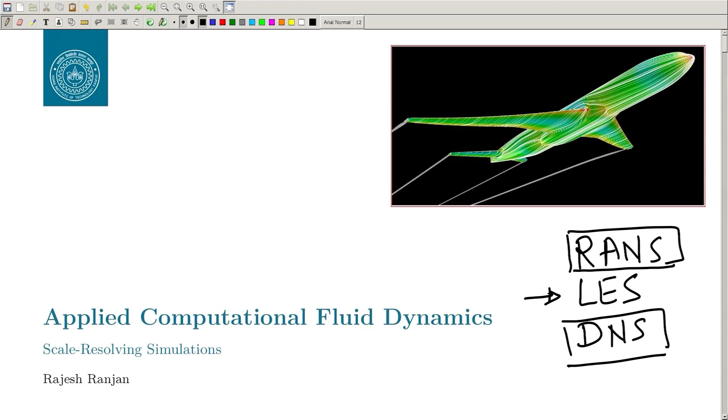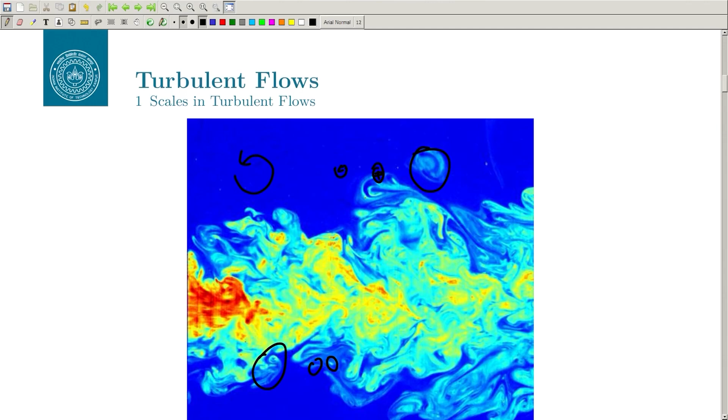So, you have a variety of eddies. When we say eddy, we have a picture like this in mind, but it's a kind of flow which has got some kind of vorticity, right. You can have large eddies and small eddies, but it's very difficult to identify or segregate a large eddy from a very small eddy, because all these different scales are mixed up. But in order to capture very small flow features, which are very fine features, we need to have that kind of grid; only then we can capture that, right.

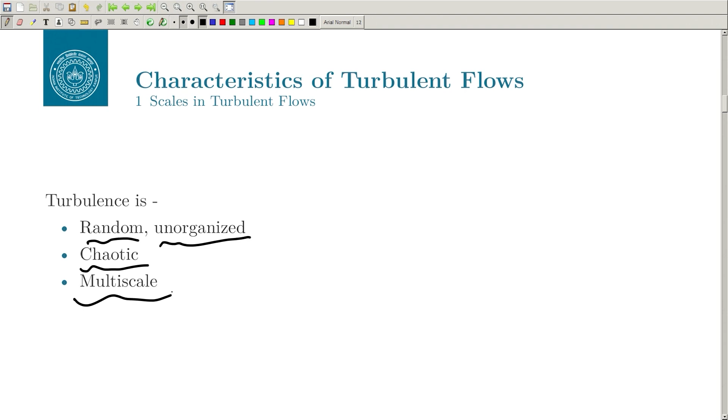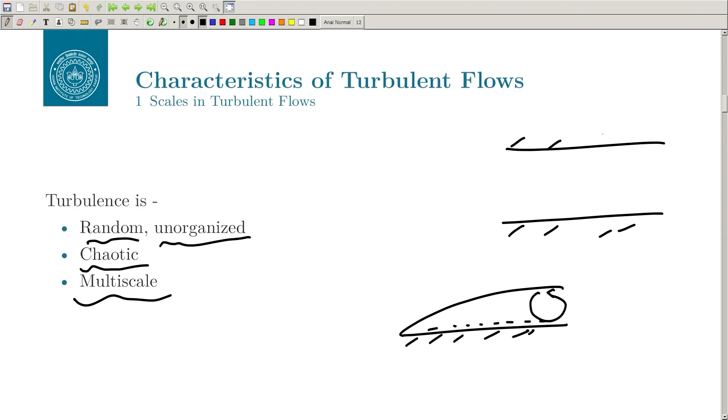So, look at any turbulent flow: the turbulent flow is random, it is unorganized, and despite being random, it has got some kind of statistical properties. It is chaotic, and it has got multiple scales. So, we can have very small scale to very large scale. Let us take the example of the boundary layer. You can have something which is happening very close to the wall, let us say here, and then you can have something which is of the scale of this. Similarly, let us say you have flow inside a channel. This is your large scale phenomenon, and then you have something inside the boundary layer. So, you have to resolve both the smallest scale as well as the largest scale.

Let us talk in terms of the atmospheric boundary layer. Let us say this is your big atmosphere. You have to resolve it, and it can go to kilometers, from the ground to the level where the ground effects are not very important. So, I am talking about that domain, which can go up to kilometers. On the other hand, you can have a few meters or centimeters, which is very close to the boundary layer. So, both phenomena are important.

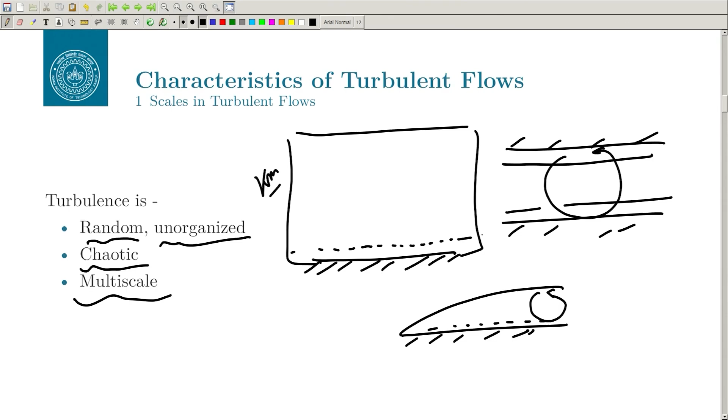So, if you want to resolve this atmospheric boundary layer using a direct numerical simulation, you need to have a grid which is very small in size, which can capture the boundary layer very close to the earth, and it can also capture the effects of the earth outside. So, this is one example. I think we have seen this earlier also. So, we have got a mean flow. This is a typical picture of a turbulent flow, where you can divide any flow field into a mean flow and a fluctuating quantity.

So, this mean flow imparts energy to the eddies, and you have large eddies. These are large eddies, and these are very small eddies. Remember that famous Richardson poem: the large eddies impart energy to the next level of eddies, and then they impart energy to the next one, and so on and so forth, till they go to the smallest scale, and when it goes to the smallest eddy, that is where the dissipation takes place, right. So, it is an entire cascade from the very large eddies to very small eddies.

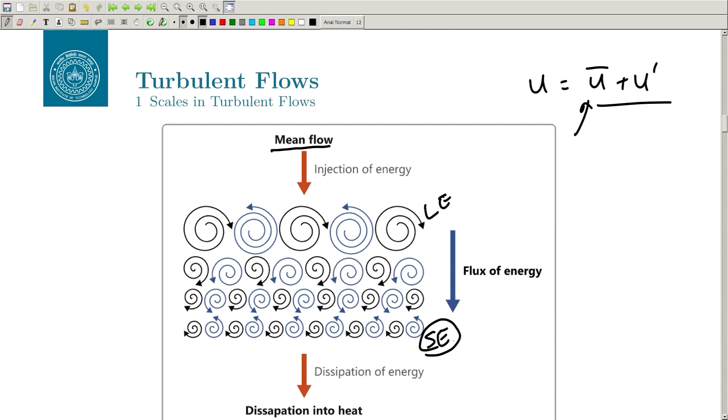So, here what is important is the dissipation, right, because here the viscosity plays a big role, and here what is important is the production, because these eddies get energy from the mean flow, and in between you will have the transfer of energy. So, you see the same thing in terms of the energy cascade, right.

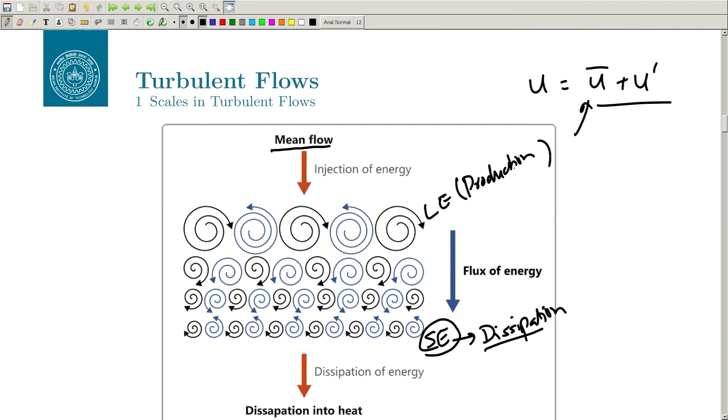So, what you see here is wave number. So, k is the wave number here. Okay. This is not the turbulence kinetic energy. So, this wave number can be related to the inverse of the eddy size. So, if you have an eddy size, let us say this is your typical eddy size, whose length is, let us say, L. So, then wave number could be written as 2 pi by L. So, if the wave number is increasing, then your eddy size is decreasing.

So, this side, if you see, is very large eddies, and this side basically small eddies, right. Now, what you see in the y axis is basically the turbulence kinetic energy density. It is not the kinetic energy, but the kinetic energy density. That means, if you take the area under the curve, this entire thing will give you the entire kinetic energy, right, and this is plotted in the log scale.

And why is it plotted in log scale? So that you can find some slope here, and this slope has got some meaning. If you have attended any course in turbulence, you know that this slope is around minus 5/3 and so on and so forth. So, when you plot in log scale, it will be a straight line. So, this is the large eddy and this is the smallest eddy, and the large eddy is represented by a length scale L and the smallest eddy is represented by length scale eta.

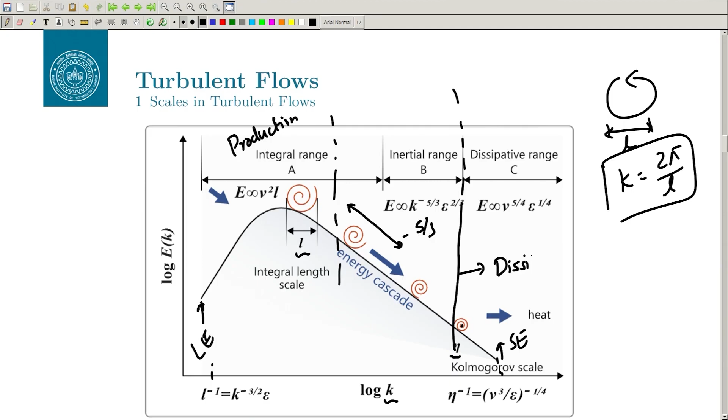So, what happens is that in this region, let us say somewhere around here up to this point, the production is important, and after this, let us say the dissipation is important, and in between is the transfer of energy. So, in the region where the production is important, the quantities that are important are your turbulence kinetic energy and the dissipation rate.

And where there is a dissipation of energy, what is important is your viscosity, because the dissipation is happening due to the viscosity, as well as your dissipation. And in between, where there is a transfer of energy, what is important is the length scale L and the dissipation of energy. Now, why are we discussing this in detail? This picture will be coming again and again, because this is the crux of the matter which differentiates RANS from DNS and LES.

In RANS, you will not see this diagram, because we do not segregate the turbulence kinetic energy based on the wave number or the eddy size. We basically model it. Since for the turbulence kinetic energy we also use the same symbol K, in order to avoid any confusion, I will call it TKE. So, in the RANS simulations, we directly model TKE and we do not segregate based on the wave number. So, we cannot get this picture, but what we can get is the entire integrated quantity of this diagram.

On the other hand, when you do DNS, you will get this entire spectrum. If you have a well resolved DNS, we should get a picture like this, we should get this minus 5/3 curve, we should get the dissipation range, and we should get this integral range. When you have LES, that is somewhere in between.

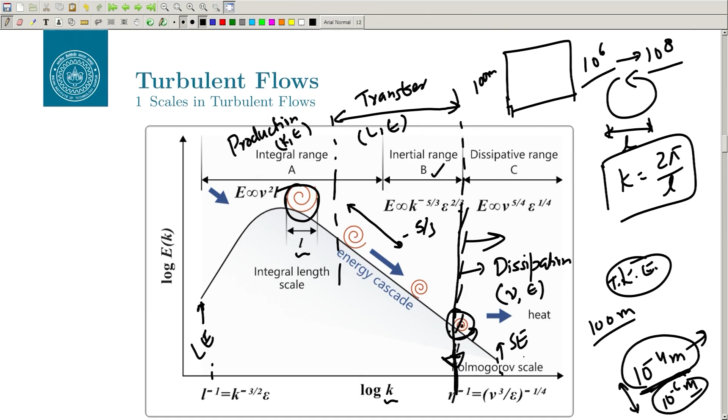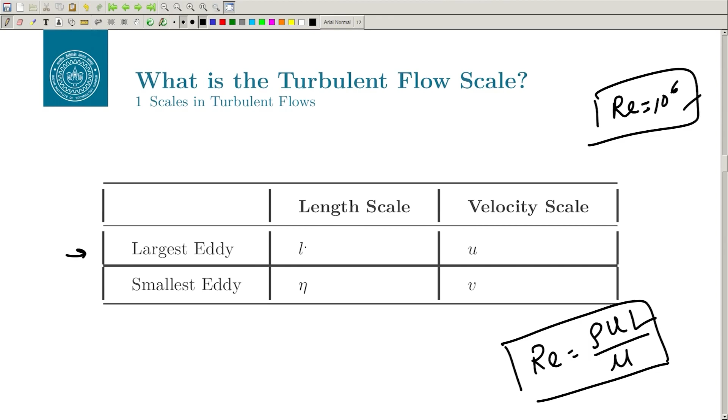So, what are we going to do? We will define two eddies. If you go to the last picture, we will have the large eddy, let us say here, and we have the very small eddy. We will take these two eddies and say that production is happening at the large eddies and dissipation is happening at the smallest eddy. And we will make some connection between the two and try to find one number for the average grid size. So, I am defining the largest eddy with the length scale L, and it has the velocity scale u.

And for the smallest scale, smallest eddies which are responsible for the dissipation, we take the length scale as eta, and we take the velocity scale as v. Now, we are going to look at the two extremes of the spectrum. One is the production, where the energy is taken by the largest scale from the mean flow, and the other side is where the dissipation is happening due to the smallest eddies.

So, this is my diagram. This is my E(k) versus k, and this is on the log scale. So, what we are saying is that for the largest scale, let us say somewhere here, what is the rate of production of kinetic energy? Of course, the kinetic energy is half m u square, and then the rate of production of kinetic energy per unit mass, that is m, and then rate, because it is rate, this is t.

So let us call it the production. This is the rate of production of kinetic energy, which is happening due to the largest eddies. M will cancel out, and T you can define, because we have defined the length scale and the velocity scale. So, the time scale will be length by velocity. Length is meter, velocity meter per second, so that will give you second. So, this will be of order of u square by L by u, which is basically u cube by L. So, this is what is written here.

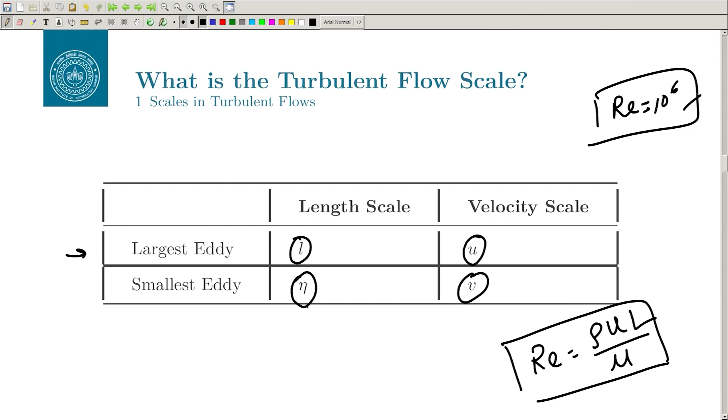Now, let us look at the dissipation, which is the other extreme here. So, what is the rate of dissipation? There are multiple ways to arrive at it. What we are going to discuss is what we have done in the RANS modeling also. The dissipation is given by viscosity times Eij, and this is the strain rate tensor, which depends on the velocity gradient. So, by a dimensionality argument, this will be nu, the viscosity, and the velocity gradient for the smallest scale, with velocity scale small v and length scale eta, will be v by eta.

Do not get confused. So, nu is like this and v is like this. So, that will be square. So, you have nu v square by eta square. That is the rate of dissipation. Now, Kolmogorov made two assumptions, and those are very fair assumptions. One is that in equilibrium turbulent flow, the rate of production of kinetic energy is similar to the rate of dissipation. So, basically the production is like dissipation.

So, you can say that u cube by L, which we derived here, goes as nu v square by eta square. Remember what we started with: we want to find out the smallest scale that we need to resolve based on a given condition, let us say the Reynolds number. So, this does not give you enough information. It relates the largest eddy to the smallest eddy, in the sense that if you know the largest velocity scale and length scale, you can relate them to the smallest velocity scale and length scale. But we want something in terms of a gross parameter like Reynolds number.

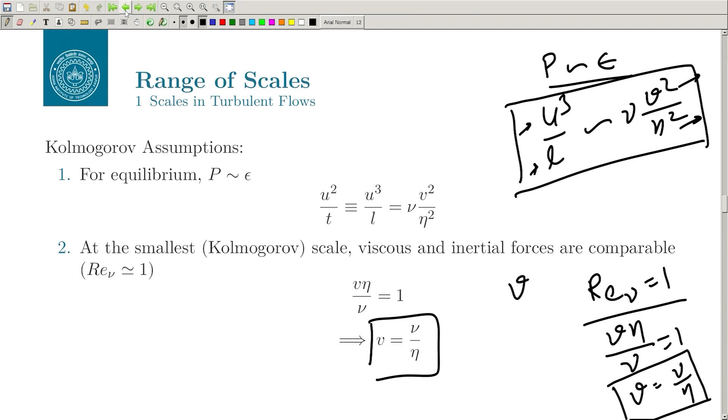So, that means v eta by nu is equal to 1, right. So, that way we can say that v is equal to nu by eta, right. So, we related our velocity to the viscosity and the length scale of the smallest eddy. Now, if you use the second assumption, which is basically v equal to nu by eta, and we know what the dissipation rate is. Okay, what is the dissipation rate? It is nu v square by eta square, right.

So, if you use that argument, epsilon equal to nu V square by eta square, and we have discussed that V equal to nu by eta. So, you can replace that V. So, the viscosity, and then V will be replaced by nu by eta, squared, by eta square, right. So, that will become nu cube by eta to the power 4. So, epsilon is nu cube by eta to the power 4, and that way you can find out eta is equal to nu cube by epsilon to the power 1 by 4.

Okay. So, we found out eta. This is basically the smallest eddy size, which we want to resolve. So, we related it to the viscosity, but there is another parameter, which is dissipation rate, and it is not easy to find out the dissipation rate. So, what we are going to do now, we will use the first assumption as well. And what is the first assumption? The production is basically very similar to the dissipation, right.

So, then u cube by L is nu V square by eta square; replace this V with nu by eta. So, that is nu by eta, squared, by eta square, right, which will become nu cube by eta to the power 4. Okay. Now, we are going to rearrange some of these variables. I am going to write it on the top.

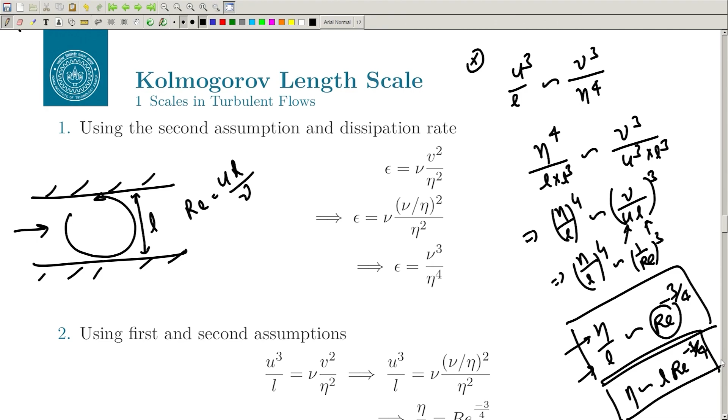Right. So, in the next class we will see some examples of, when we have different Reynolds numbers, what kind of grid size we get when we want to resolve the smallest scale to the largest scale. Okay. So, we will stop here.